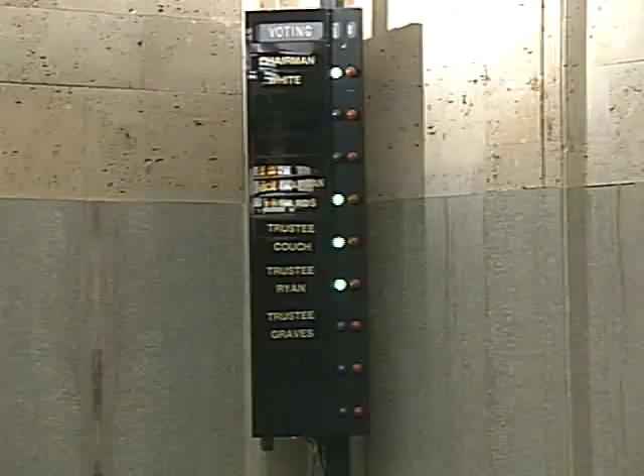It's approved. The next item, item 8D, our authorization to execute a consent order and pay a $10,749.58 penalty for killing fish. Move approval. Second. A motion and a second to approve item 8D. Is there comments or questions? Just a question, how long did that manhole run?

The actual report was not a very long time. Unfortunately, it wasn't in an area where we could see it, and so we don't have an accurate rate. We are confident it killed fish based on the ODWC's report, and that does necessarily carry with it a fine of $10,000. Again, grease blockage with some structural damage, and not in a place where we could see it. Okay.

Further questions, comments? Is there a standard price for fish? That's about $2 a fish. Is that what they... The fine is $10,000, yes, and then the $749.58 is the price for fish. You can get them out of our fish hatchery and just give them... You know, I just... No, we want that to never happen, and it's on your docket, so that it makes certain that we feel properly reminded. Further comments? Voting, please.

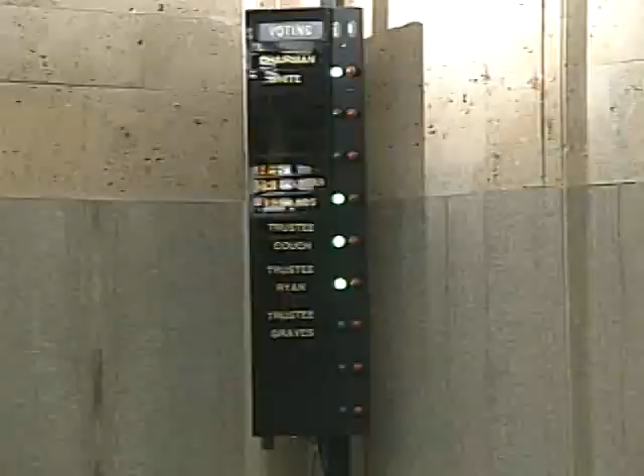Resolution approved. Next item is the resolution extending services concerning the utility billing system. Move the resolution be adopted. Second? A motion and a second to approve item 8E. Questions or comments? Voting, please. 8E is approved.

8F, resolution concerning the breakwater at Draper. Move approval. Second. Motion and a second to approve item 8F. Are there questions or comments? Voting, please. 8F is approved.

Item 8G is a joint resolution between the city and the trust directing the general manager to negotiate concerning the Ninth Amendment to the service agreement. Move the resolution be adopted. Second. But I have a question: when we decide that negotiations might not be successful and then go for RFP, do we have a time in mind? We would recommend that if we haven't reached agreement by the end of this calendar year, that we proceed so that you have all the options available to you with preparation of an RFP and beginning that process.

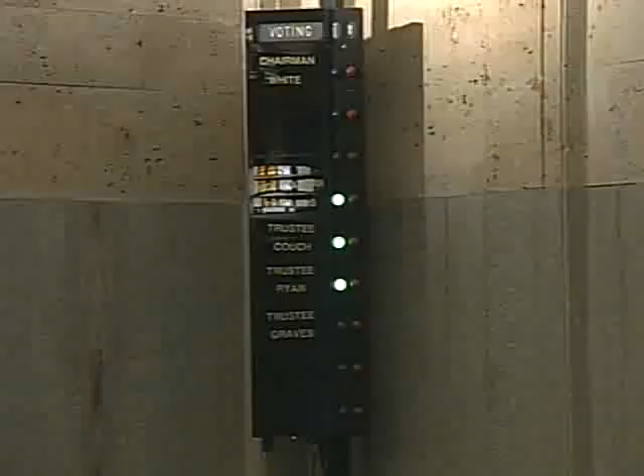Item 8H, approval of the resolution approving the fiscal year 11 through 15 capital improvement plan.

Mr. Chairman, Mr. Samandi is here with us today. I would like to share with you some information about our 5-year capital improvement plan. The plan is developed on an almost continuous basis using several tools we have in our toolbox. It's always a challenge, and one of the things we've done since we presented the CIP to you in January is make certain we looked at particular locations of system strengthening. We're not addressing all possible problems that may exist in the system, but we're focusing on some large delivery issues of reliability in this program for both water and sewer.

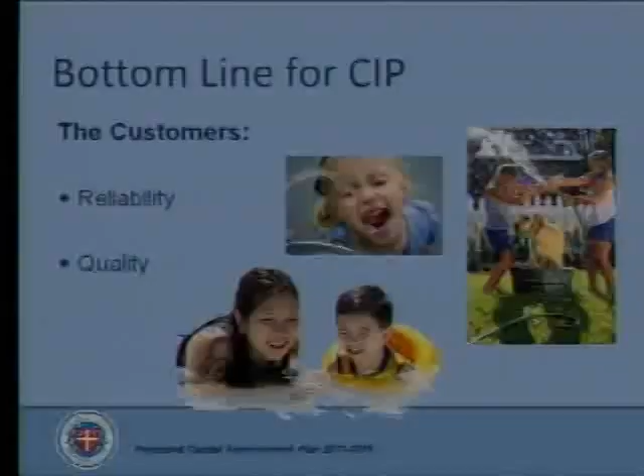Good afternoon. My name is Sam Samandi, and I'm the Utilities Engineering Manager. What we're proposing here is for the next 5 years what our capital program should be. When we put the CIP together, the overriding issue for us is to make sure we have reliable service and provide good quality water service to everyone.

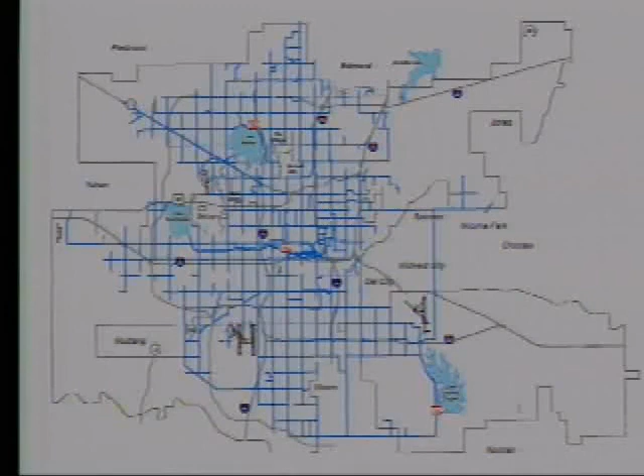The challenges we face on the water system is that we want to make sure we have adequate pressure for everybody, and we want to make sure the flow gets to everybody. Also we want to make sure our system is strong enough that when we have failure, we can respond pretty quickly and have provisions for growth and expansion in the future.

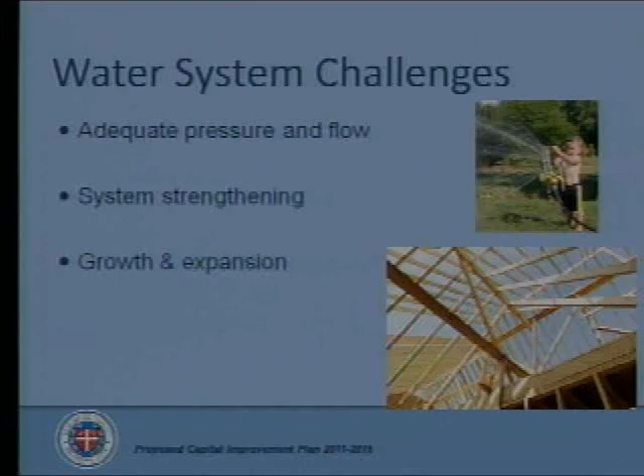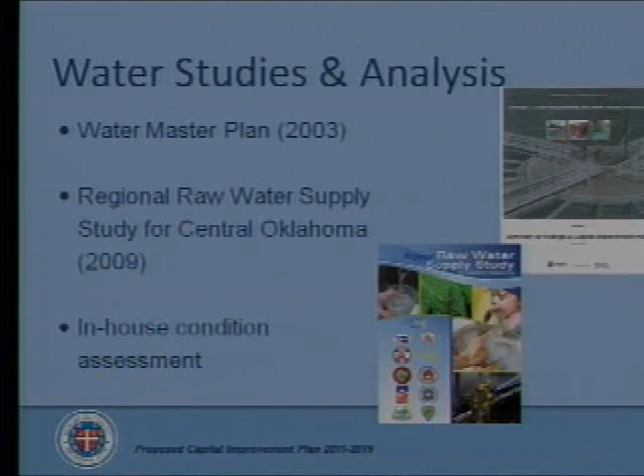The basis for all of that is done through different things. One of the major studies done to establish a guideline for us for the future was the Water Master Plan completed in 2003. We have also recently finished a study that pays a lot of attention to the raw water supply system for central Oklahoma. It was completed last year, 2009. In addition to those two studies, we continue to do in-house condition assessment to address our immediate needs.

One area would be just east of the airport on the south side. We still have some low pressure issues when peak demands are around us, and also providing a lot of water and addressing pressures out on the very west side of town. As you'll see in the next slide, there's a lot of issues around the northwest part of town that we want to make sure we address.

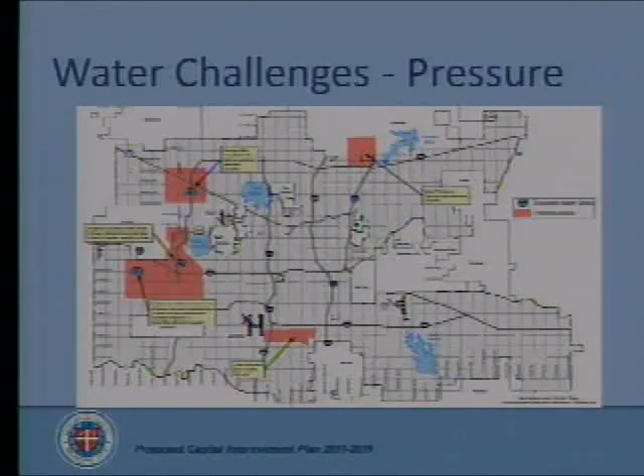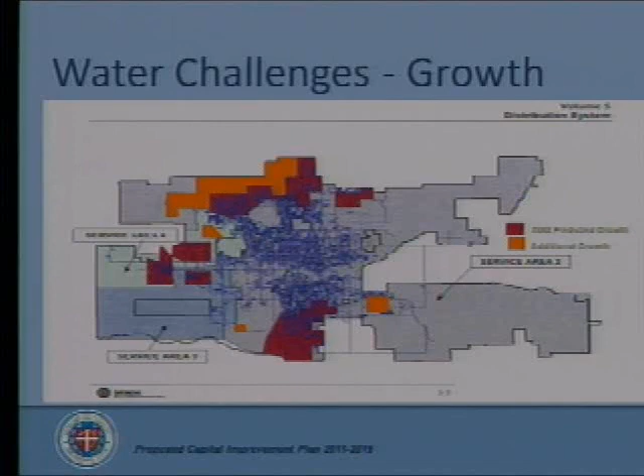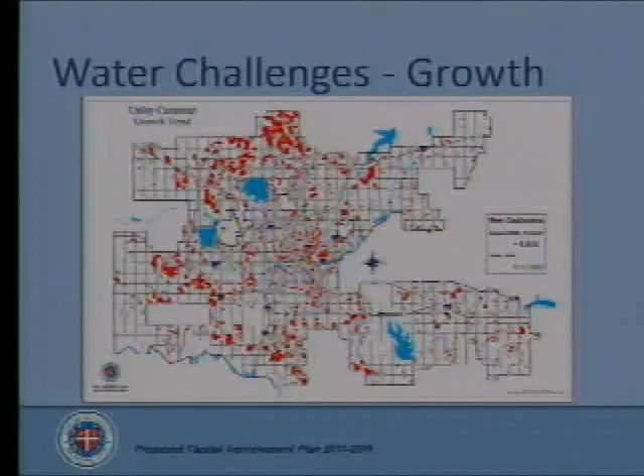What we're proposing to do in the next 5 years is to spend about $272 million, somewhere around an average of a little over $54 million a year.

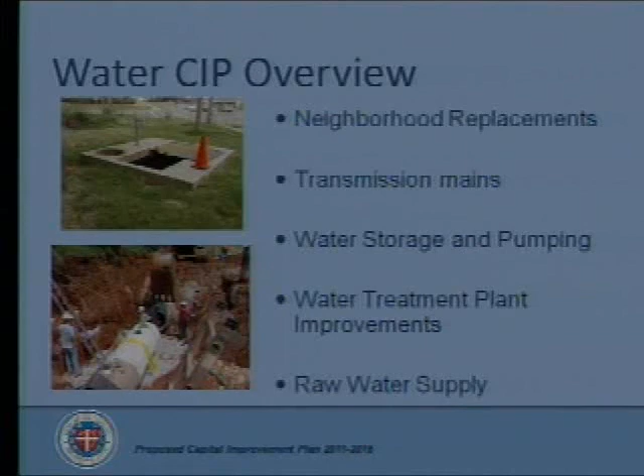To give you an overview of the CIP, there are 5 areas we're trying to hit in the next 5 years. We want to continue with our neighborhood replacement, deal with the transmission mains, build the storage and pumping facilities, and pay a lot of attention to improving and increasing our capacities at the water treatment plants. And not to forget the raw water supply, which is a big issue we want to deal with. Those 5 categories are addressed in this CIP program.

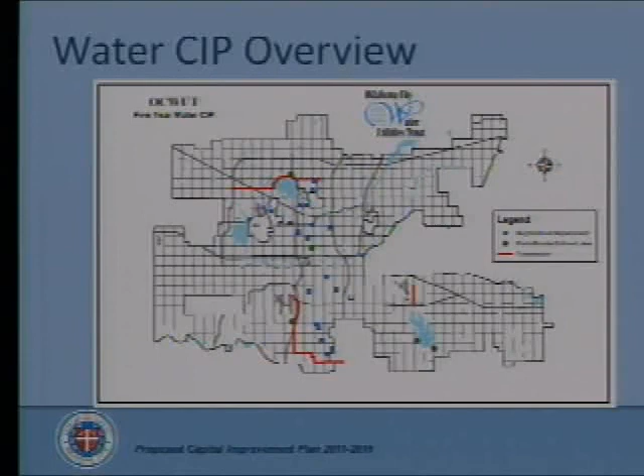This slide shows all of those improvements in a graphical mode. The blue dots show where we plan to do a lot of neighborhood replacement, and the red lines show the major improvements on strengthening our system and delivery to the west, east, and directly southwest of town.

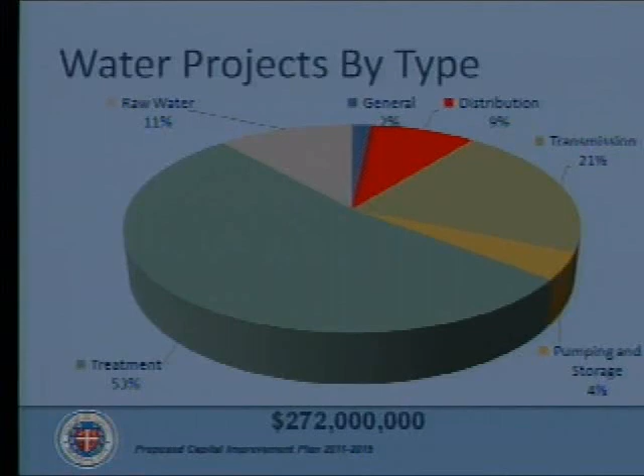This slide shows the water projects we intend to do based on different types. 53% of all the CIP on the water side is going to go toward the treatment aspect of our system. Another major part, 21%, is for transmission main. The raw water supply is about 11%, and distribution system improvements about 9%, to mention the major ones.

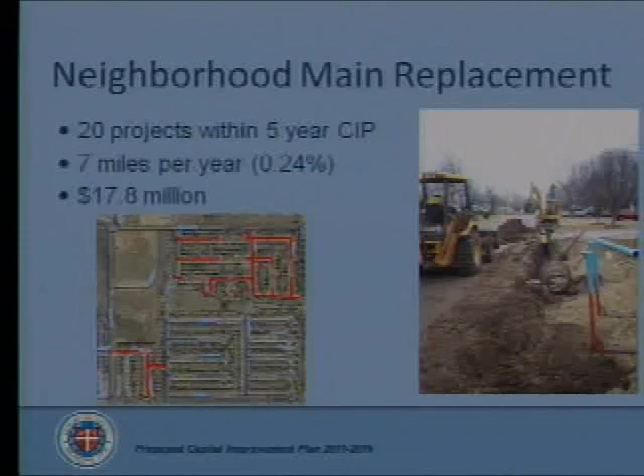For neighborhood replacement, we plan to do about 20 projects within the next 5 years, somewhere around 7 miles per year, replacing about 0.24% of our distribution system.

Another part of the CIP is adding strengthening to the system from Hefner Water Treatment Plant to the east and west. This past summer we had a failure of the line going out of the Hefner Water Treatment Plant. It was a concrete pipe, and it caused a bit of havoc on the west side of town. So we've brought in a project that was already designed up front to take care of it, and that should come to the trust hopefully in the month of August.

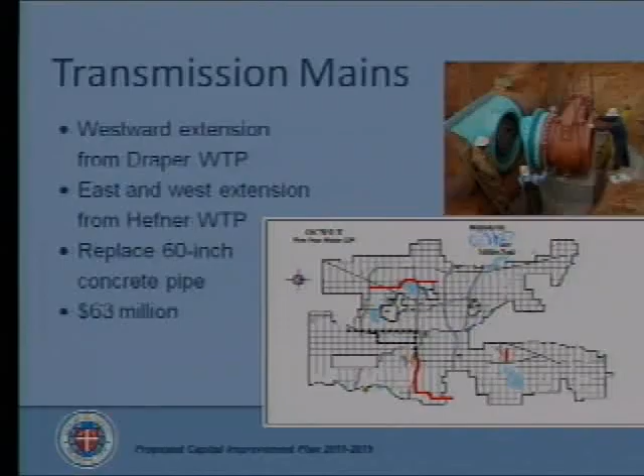Another improvement we want to do involves a concrete 60-inch pipe right across from Tinker Air Force Base. We want to make sure that it's replaced in time.

Another part of the CIP on the water side is adding storage and pumping to the system. This is slated to be somewhere south of the airport in Oklahoma City, and it's going to cost us somewhere around $11 million.

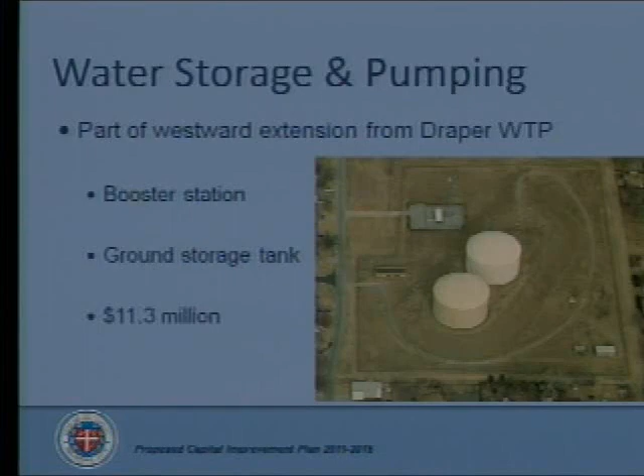For water treatment plant improvements, we're putting emphasis on the Hefner Water Treatment Plant. We plan to expand it from the existing 75 MGD to 100 MGD. Improvements would include adding another pump at the pump station, another chemical feed building, surge protection for the facilities, and additional improvements to the low-lift pump station.

The Draper treatment plant improvements include electrical upgrades and improvements to the high-service pump station for delivery of water.

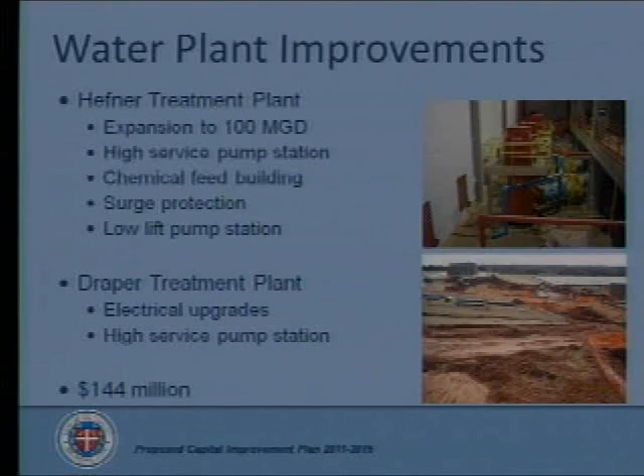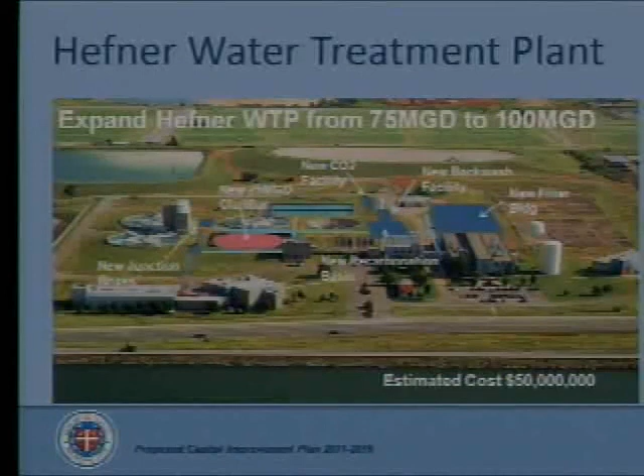This gets into more detail on what we're planning to do at the Hefner Water Treatment Plant. It's estimated to cost us somewhere around $50 million. We're planning to add a new clarifier, new CO2 facilities and backwash facilities, and more filtration capacity that the plant needs.

On the raw water supply side, this slide shows all the important elements of the southeastern raw water supply. At the top you'll see the Draper Water Treatment Plant, and all the way down to the bottom you'll see Atoka, McGee Creek, and a connection to the Kiamichi River Basin and Sardis Lake on the north side of that.

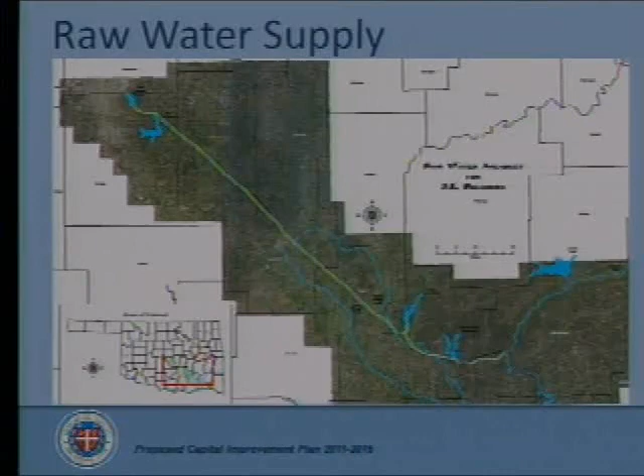In this CIP we plan to build the second Atoka pipeline, parallel to the existing pipeline. We've already started the environmental study on that portion, and we plan to start the preliminary engineering on the second Atoka pipeline as well.

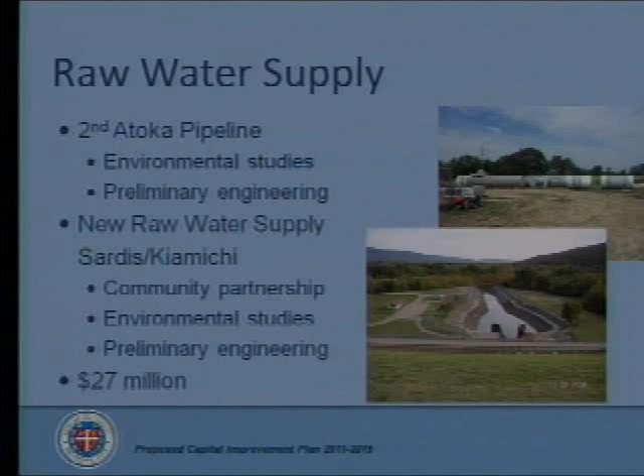We also plan to start on the raw water supply from the Sardis-Kiamichi Basin. We hope this is a real community partnership with the communities around Oklahoma City and everyone else along the pathway. We plan to start the environmental study and engineering, and monies are assigned to those projects.

Another big project we'd like to start is evaluating the connection of the northwest system of Oklahoma City and the southeastern side—connecting Hefner and Draper either by a raw water or treated water system. We plan to study this, see the advantage of either way, and decide the best way to go.

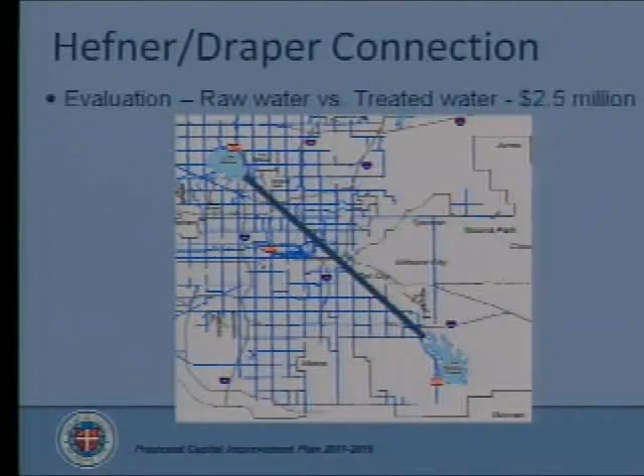All of that is anticipated to cost somewhere around $272 million.

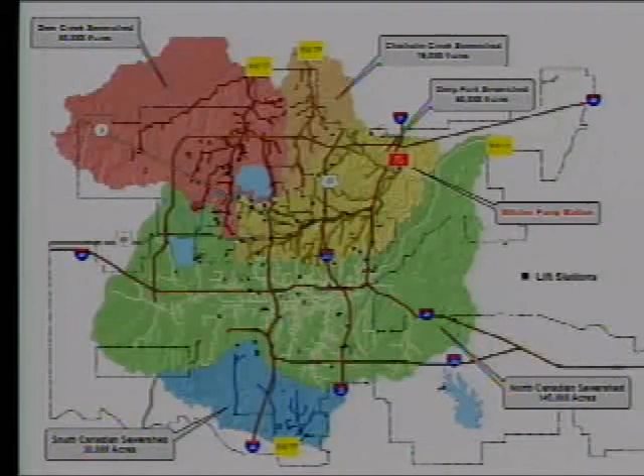Of course, everybody remembers we had a recent flooding of the Witcher Pump Station, which we've got to take care of. And we have an engineer working on that project to make improvements to the station, and we'll make provisions to make sure we have protection against flooding. The same kind of challenges we face on the wastewater as we did on the water. We want to make sure our system has sufficient capacity in the collection system and in the treatment plants to handle the flows. And we want to strengthen the system and have provisions for growth for the future.

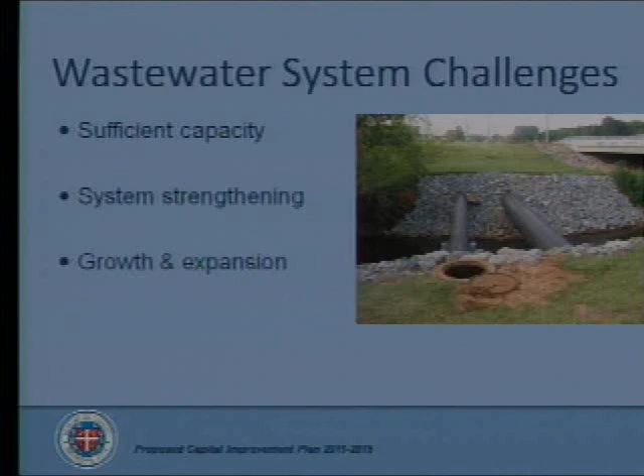The basis of all of those decisions for the CIP are made by these studies that we've done. We completed the wastewater master plan just last year, 2009. And then also we did an in-house study in order to respond to an EPA request about the collection system in our treatment plant system. And then also we have a consent order with the Department of Environmental Quality that tells us these are the areas that we need to improve on.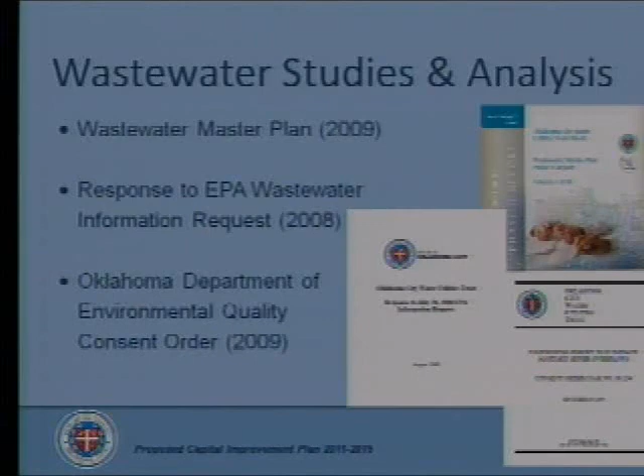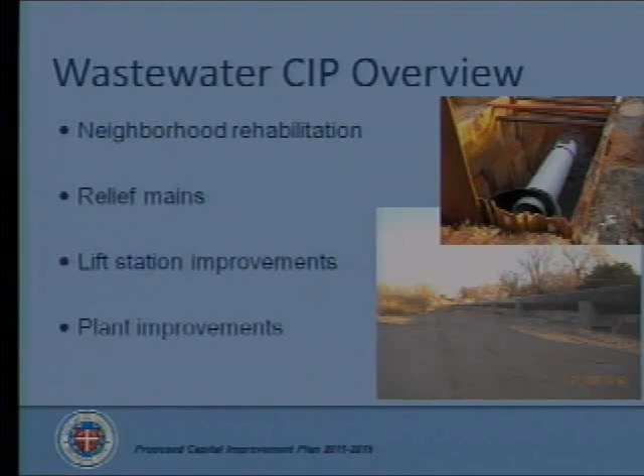In this CIP, we're hitting on the neighborhood replacement projects, adding relief mains to the system. We're going to make improvements to the plants and a lift station improvement that we have slated. The total cost of this capital improvement is somewhere around $191 million, close to about $38 million a year.

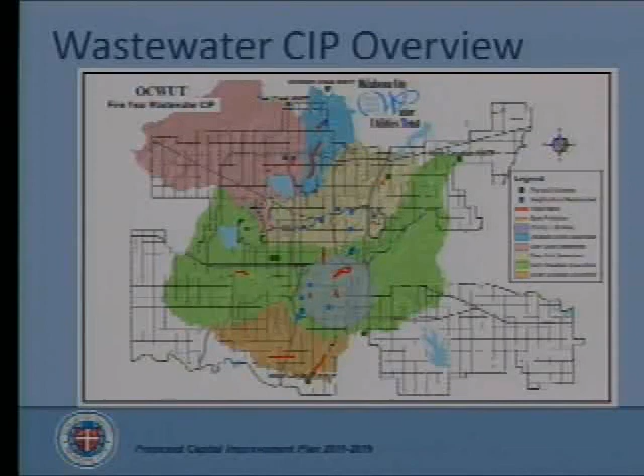This particular slide shows an overview of all of the projects we plan to do. The blue dots you see on that particular chart are the neighborhood improvements we plan to work at, and the red lines are showing the relief line improvements we plan to do. The little circle in the middle is an area that was recommended by the master planners to do additional study, I&I study, flow monitoring of the flows, and see what improvements can be made without building a whole lot of other interceptors to relieve the existing system.

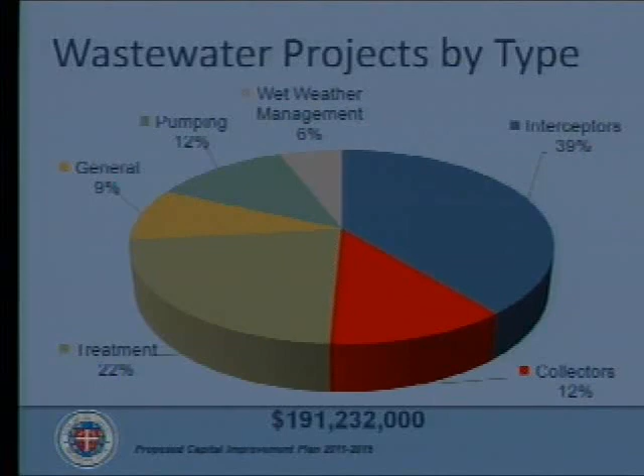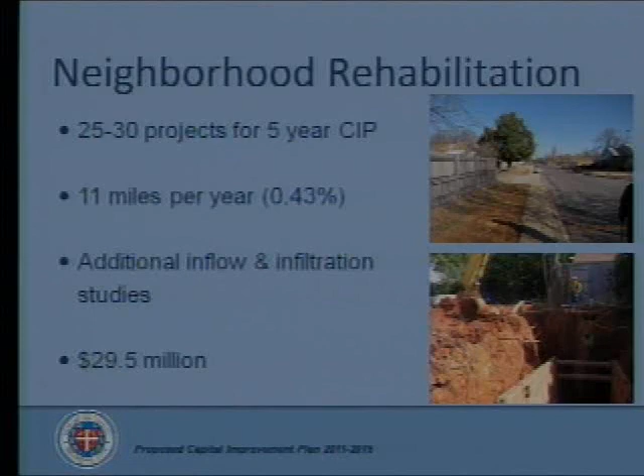The wastewater project types here, most of the money is slated to go toward large main relief lines, the interceptors. And then after that, there's a lot of money for plant improvements and the collector system, and some money for the pumping, which is mainly associated with the Witcher pump station. Neighborhood rehab, somewhere around 25 to 30 projects for the next 5 years. We're doing a little bit better on this side. We're doing about 0.43% of system replacement per year, about 11 miles per year of replacement. And we're going to do I&I study and spend about $29.5 million on that.

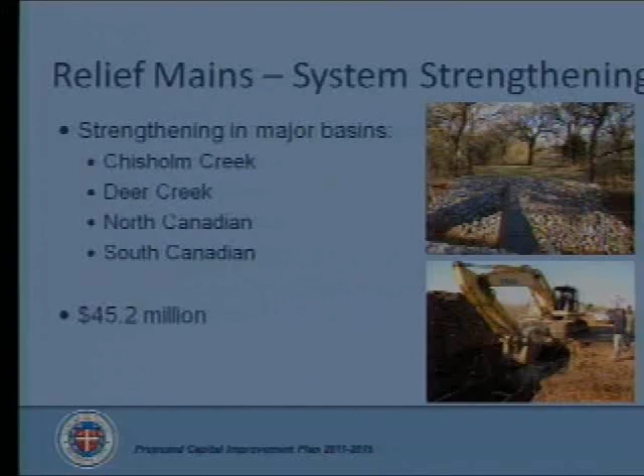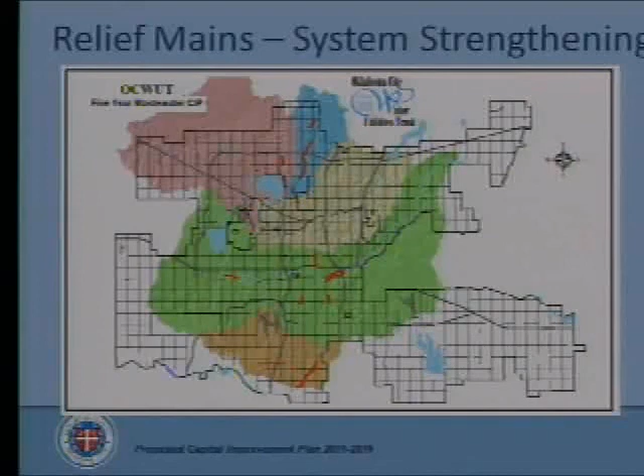Relief mains are in every basin within our reach, Chisholm, Deer, near the North Canadian and the South Canadian, and we'll spend about $45 million, we hope. The relief mains are shown on this particular slide in red. Most of it is around Chisholm Creek and then South Canadian, and some in the heart of the city with the North Canadian basin. Lift station improvements are primarily for improvement around Witcher pump station.

We're planning to replace some old pumps and add VFDs and replace the existing meters with new ones, and make sure that the North Lagoon that serves the pump station is also taken care of. We also have an additional pump station that we're going to make improvements to, so the total cost is somewhere around $22 million, we believe.

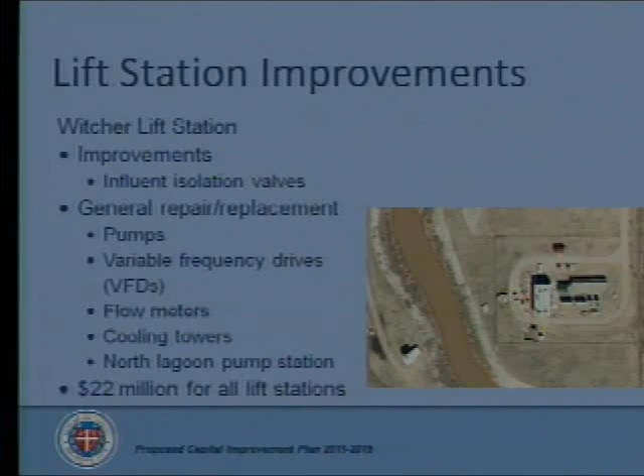Wastewater plant improvements, as everyone knows, we're currently working at the Chisholm plant to expand the capacity to about 10 MGD. In this next CIP, we plan to expand to 11.5 MGD, provided we reach an agreement with Edmond. We're also doing a big project on the South Canadian wastewater treatment plant side, building a big equalization basin to hold water when we have a lot of rain and process through the plant. And we're adding a clarifier to Deer Creek. We're going to start evaluating that and see if that's really needed, but that's what we plan to do.

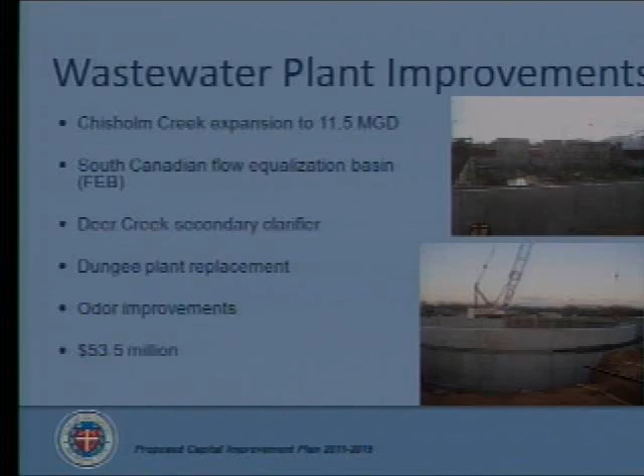And the old Dungee plant, it's a small plant, we're hoping that we can replace that with something a lot better and new. And provisions in the CIP to deal with odor issues as they come up. The total cost is somewhere around $53.5 million. All of that stuff put together is about $191 million for the capital improvement plan. This particular slide shows the water and wastewater altogether for the next 5 years adds up to about $463 million. That's close to about $95-96 million a year.

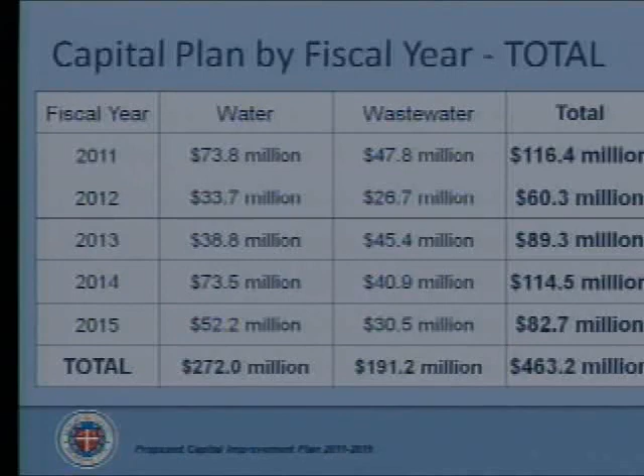This last slide that we have here puts everything in kind of a summary here. The CIP that we have here does not include the initial water supply payment that we made to the state in June of 2010. But the financial and rate plans will take that into account.

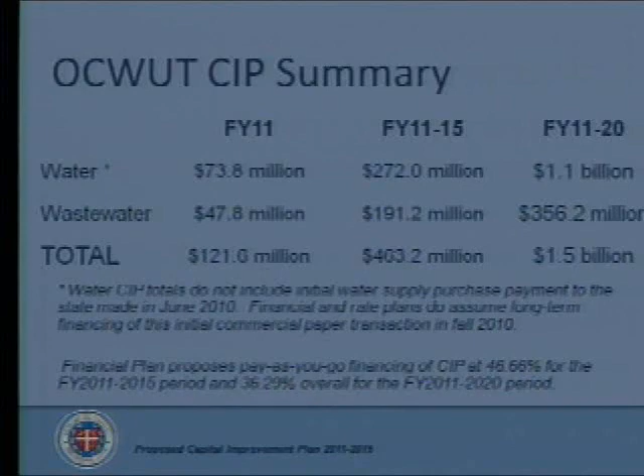This slide also shows us what we are thinking about for the next 5 years. We're looking at FY 11 to 20, and as you can see, the total CIP is about $1.5 billion. That brings me to the end of this, and I'll be more than happy to answer any questions you might have.

A question, Sam, on the Chisholm Creek Interceptor. When do you expect to have that finished? It shows expenditures clear out to 14. Yes. Our plan is to continue the interceptor all the way to close to about Northwest 115 and Penn Avenue. Right now, we have construction all the way to Memorial Road.

So depending on what easements we get, the next phase is supposed to go into construction. That would bring us to almost 122nd. We plan to advertise that before the end of this year. The construction of that will take probably about a year and a half to finish. And then the next phase, which brings us to the end of it, will probably be by the end of this 5-year CIP plan.

Can we unequivocally say that none of the work we did in the vicinity of Chisholm Creek contributed in any way to the flooding that we experienced out there? I doubt it. The Chisholm Creek is a very narrow basin, and so it is prone to some flooding when we have a lot of rain. What we have noticed with these interceptors that we've put in the past few years, we've buttoned up the system, and more flows are going to the wastewater treatment plant as it exists today.